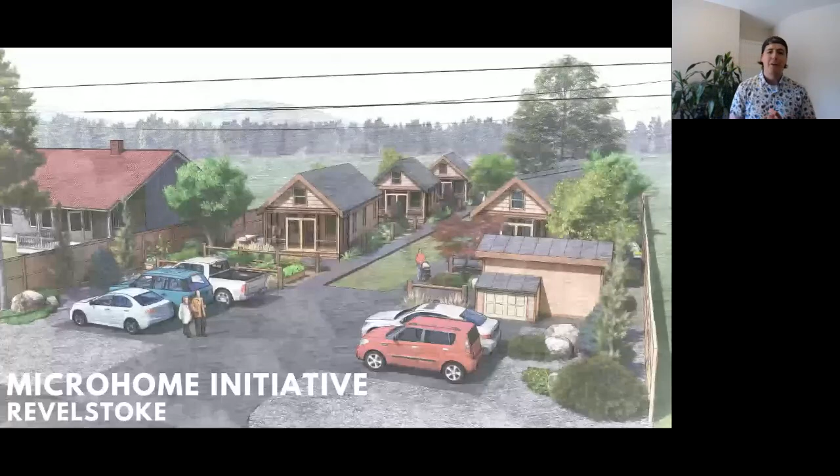And so yes, this is the Microhome initiative. I think the big value that I add to this endeavor is the ability to render and create visualizations that can help bring people on board to a project.

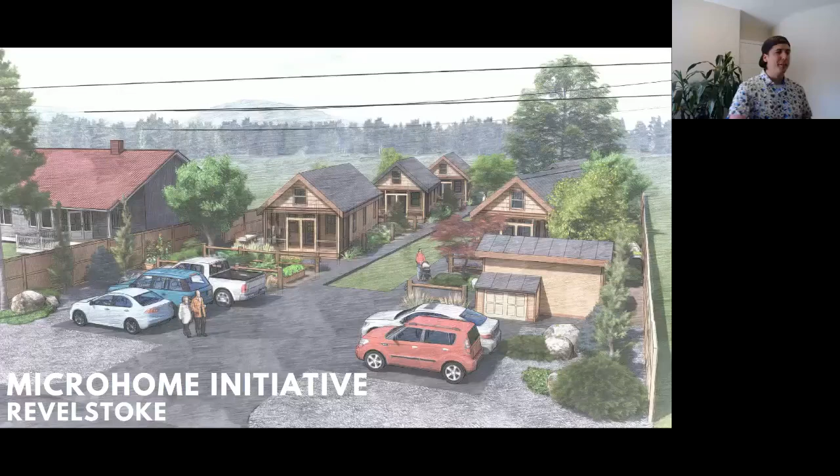Affordability, the housing crisis, these are huge topics that are really difficult for people to wrap their heads around. Ultimately, we need a plan in order to see how that is established. That today is an evolving challenge, but I'll show you the renderings and the purpose of this project.

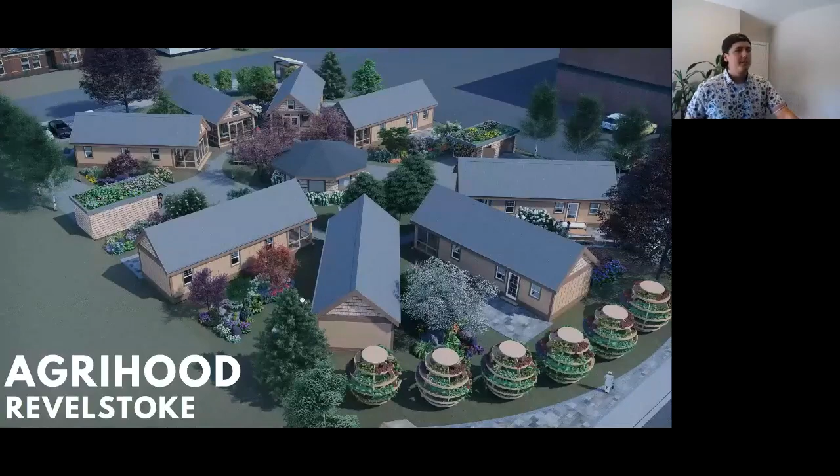So this is the project that I started on. I really wanted to look at can we create a pocket community of small homes and create them in a model of perpetual affordable home ownership. This is something I'll get to in a second, but also develop it in a way where we have sustainability and lifestyle practices of a regenerative place to live as some of the core foundations of the environment we're choosing to live in and present to our neighbors.

So some of the initial questions I had were: how big do these houses have to be? What's appropriate for the demographics of the people here? What amenities inside of the homes and outside of the homes shared among the community would be important to our residents? What would it cost to create something like this? And how can we ensure that this is perpetually affordable?

So we started doing a little study about the available land in the community. As a pilot project, I really wanted to demonstrate how we can utilize urban land within a community, in denser populated areas. I know in some of the concepts I'll show you later, we have acreages to work with, and you can do some really beautiful and creative things with a lot of space.

But looking at smaller land masses, what can we do to create home ownership where in traditional zoning and parcel subdividing, there are minimum lot sizes, minimum house sizes, that ultimately creates this sort of urban sprawl of grid-like patterns of streets that take up a lot of space, but maybe aren't using them as effectively. So there is an argument here to, in denser populations, maybe we should be building up and really densifying.

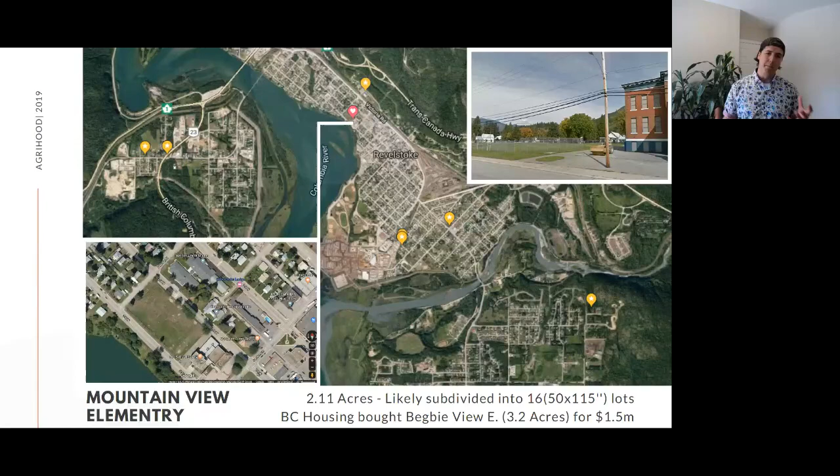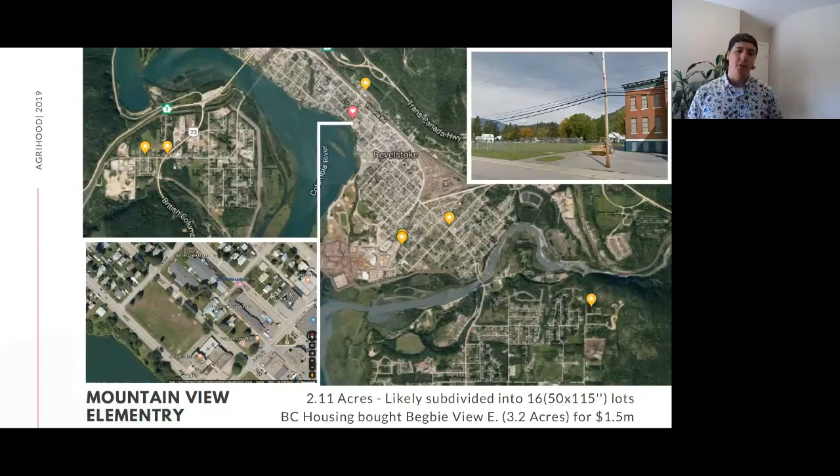But this is trying to find that happy medium, that blend between enjoying your outdoor environment, enjoying your own single detached home, because I still believe that that's what a lot of us have grown up with, are dreaming about owning and wanting in our lives. The reality for the future is that that is a privilege that many of us human beings on this planet may not ever have the privilege of having moving forward. So how can we still have those deep desires to own our own home, but do so affordably?

So looking at this old school, which has recently been turned into offices and a restaurant. If you're ever in Revelstoke, go to the old school eatery, it's absolutely amazing. Then they have this additional school property, the soccer fields here.

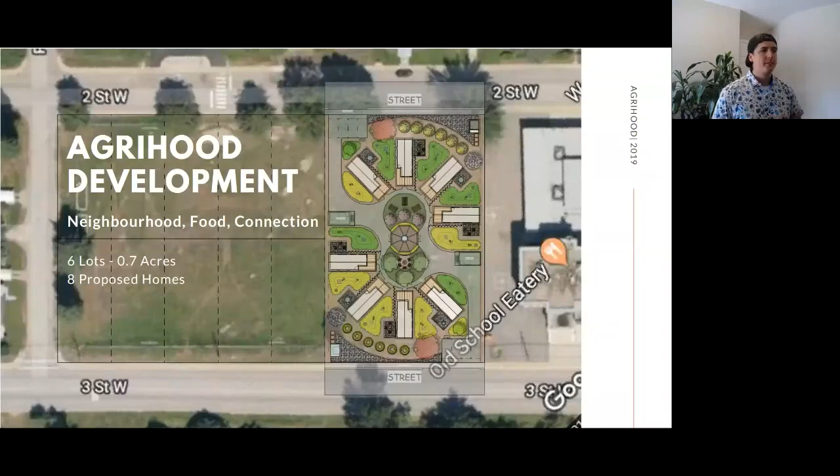And if we were to look at how the city would traditionally subdivide this land, they would create about 16 parcels here on that square block. And what I'm proposing here, instead of 16 single family homes on this lot, we're able to propose 8 homes on 6 lots. So this is the concept plan here.

And the focus of this is, how can we change a few paradigms here so that we're creating something different, but also familiar to what we as consumers want to buy, but also what we're sort of looking for in a community.

So the big thing that I wanted to address, first of all, is just how we approach the home. If you look at the suburbs or really any house in North America, you'll notice one familiar attribute is that we have streets that turn into driveways, driveways to front doors. And ultimately what that does is it creates this relationship between you and your vehicle and not your community.

And in order to connect with your community, you have to go to a park or walk down the sidewalk and confront someone head on. And ultimately, that doesn't lead to a natural conversation or an opportunity to really connect with the people that you live with in your neighborhood, your space.

So I really wanted to address this by changing the paradigm a little bit, by putting parking relatively far from the homes, but within a very short walking distance to the front doors, which I hope encourages individuals to walk in front of others' homes and connect with them inside of these social spaces.

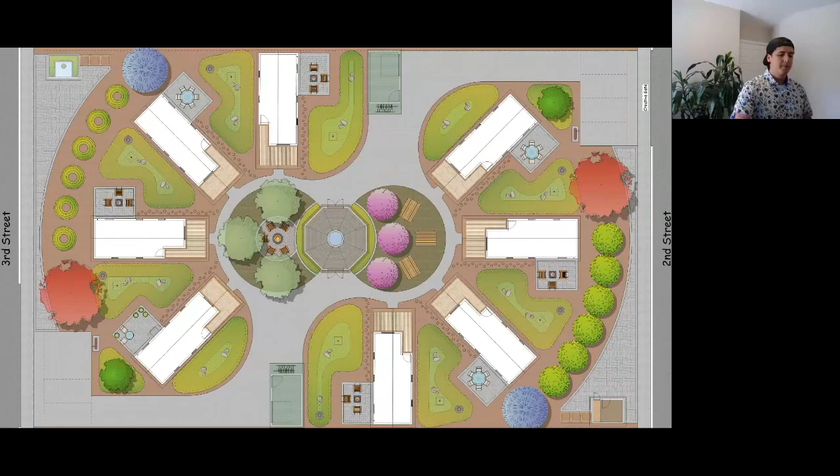So this is our concept here: if land and houses are becoming too expensive for one person to own, can we as a community come together and decide to purchase land and develop it ourselves in shared commons to spread the cost of development and infrastructure among all of its residents?

The strategy here would be to develop this parcel as a bare land strata. That allows us to have individual ownership of each of these homes, but have the remainder of the property in shared common. It also ensures that we are following traditional opportunities for individuals to grow into the middle class and create some stability in their housing options. So for example, you'd be able to get a mortgage, you'd be able to get insurance, and you'd have a freehold title to each of these homes.

And then as a strata community, you would elect a council, and that council would represent your community to address things like, are we going to pay to have our grass cut or our gardens maintained? Are we going to pay to have the snow removal? Or are we going to come together as a community and decide to save on those costs and do them ourselves?

Which theoretically, I hope, is a path a community like this would take, so that we have shared ownership and responsibilities to each other and to our space, which creates more community and connection. But if paying for it ensures that this place remains beautiful, then I think that is a really great option too.

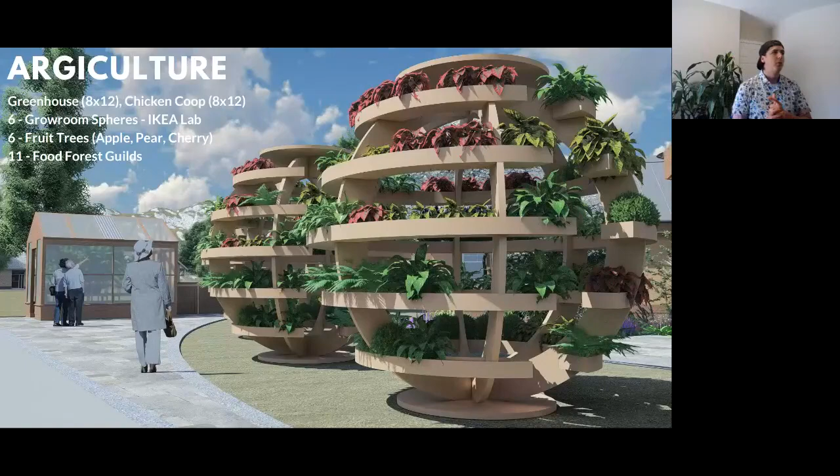Looking at agriculture as a big part of this project on this land, we'd have these 6 grow spheres. These are unique products you can actually download from IKEA, and you take them to a CNC machinist who cuts out all the parts, and you simply put them together to create this really unique grow globe. Then you can run irrigation through it, which is a really cool opportunity to not only grow food for your community, but show it off as an architectural feature, and even create a little sitting area inside there too.

Other areas like the fruit trees, the food forests in between the homes—if you've never heard of a food forest before, it's this concept of trying to replicate nature in a manicured environment of our design. That would allow us to grow upper story trees like walnuts and cherries, then lower story trees like pears and apples, and below that currants, blueberries and raspberries, and even below that strawberries, and down below mushrooms and other root vegetables, all growing in one unique bio environment, which I think is a really cool way to address food security, but also beautification and education of this space.

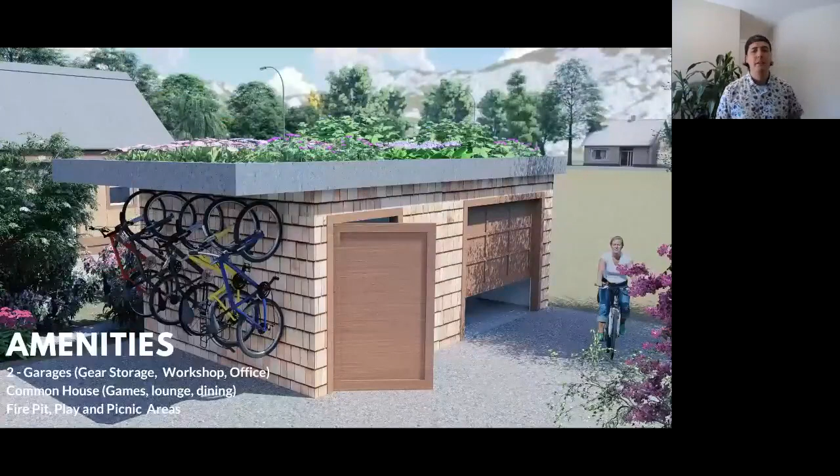I think one unique attribute that agriculture has, and what I believe should be developed in every single development, is that it creates intergenerational relationships too. It allows the seniors to connect with the youth and show them how it's done, get your hands dirty and work together, which I think is lacking in a lot of our modern communities.

When seniors get older, we put them in older age homes. When single mothers have kids, they struggle to find daycare. I think to create a strong and successful society, it's important that we're there to pick each other up.

And that's what I hope these communities can do. So some of the amenities, like I shared, a building like this could really take any shape or form.

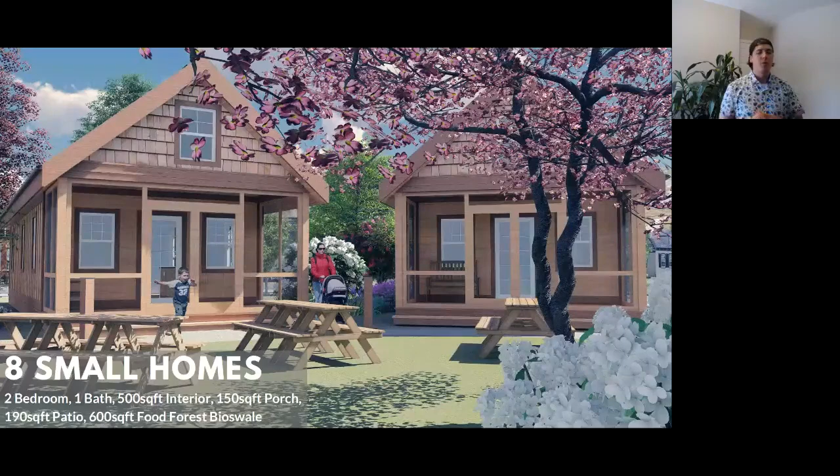A big part of this is, well, what do these houses look like and what is important in these homes? Through our research, we identified some main demographics of Revelstoke, the first being single parent families, seniors, and first-time homeowners.

A lot of the community in Revelstoke love this place, but for whatever reason, mainly affordability, they can't live here any longer. Seniors are owning big houses they can no longer maintain because there's nothing to downsize to, or young people like myself are trying to move to this community. I work remotely, and the housing affordability is really challenging.

So how do we get new blood into this community that ultimately serves volunteer organizations and all of the jobs in the community? How do you ensure that they have a stake in this town as well?

So we identified that each of these houses should, at a minimum, have a 2-bedroom option. That would allow a single parent family to have space to raise a family, or allow an individual to work from home and have an office, or just add more community members and more bedrooms to this community.

So each of these houses is about 500 square feet in size, with a 150 square foot porch, which I feel is really important for Revelstoke, because we kind of live in and out of our homes quite often—storing snowboards or skis and having that separation so you're not shoveling directly in front of your front door. There are some days I've had to literally shovel my way out of the house.

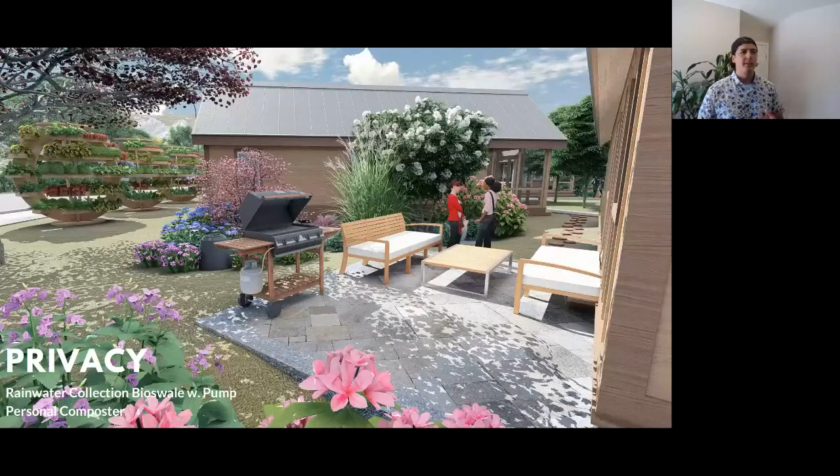So this is the blend we're trying to establish between an eco-village and ownership. Somewhere on this dynamic, we have the eco-village where everyone shares everything. They may not necessarily have home ownership, just living in a shared space, eating together, cleaning together, growing food together. That in itself can be a very beautiful and enriching lifestyle.

But for many of us modern Americans, it can be quite scary to connect with neighbors on that level constantly. I've lived in eco-villages for a few weeks at a time, and I'm quite open-minded, but I struggle sometimes with needing my own space, needing to cook my own meals, because those are the things that make me happy. So what I'm trying to establish now is a blend where we can have all these things by choice, but also the necessity of affordable home ownership in Canada and the United States.

On the other end of the spectrum, you have home ownership, with fences and driveways that disconnect us from our communities. In our society today, it's becoming so important for us to connect and create relationship, because there are so many things trying to divide us and create differences among us, that I believe these spaces can really help partner us and blend us back together as one larger global community.

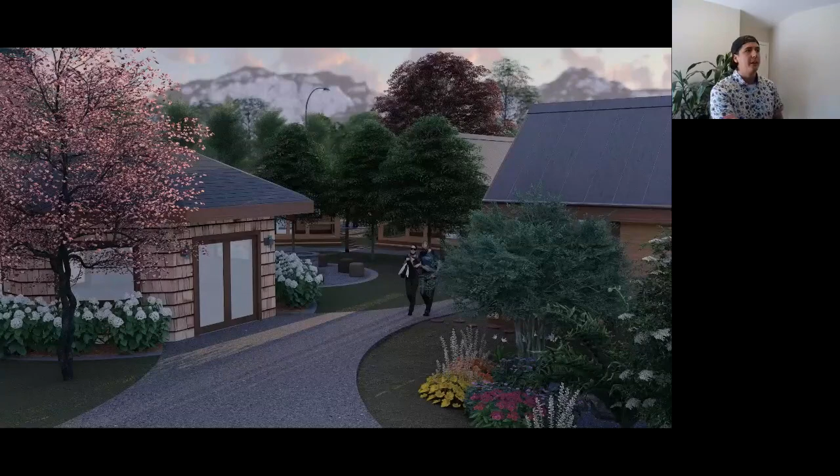This is just a final view of a night shot with the Begbie Mountains in the back. Really, what I hope for is a very beautiful place to live.

So if, for example, about an acre, three-quarters of an acre, would cost $600,000. Currently, I'm looking at a project where we can purchase 3 acres for $800,000, which allows us to do a lot more creative stuff. I'll show you in a moment.

If we were to look at creating these small homes, I recognize that $200 a square foot for housing is probably not realistic anymore, probably closer to $400 a square foot. But let's use this as a case study of what we think should be appropriate for home ownership. So about $1 million for the houses, about $250,000 for amenities, buildings, landscaping, utilities, and legal, calculated roughly at 20% of total construction costs. If we were to develop 8 homes on that small piece of property for $2 million, we could, in theory, create each house at $250,000.

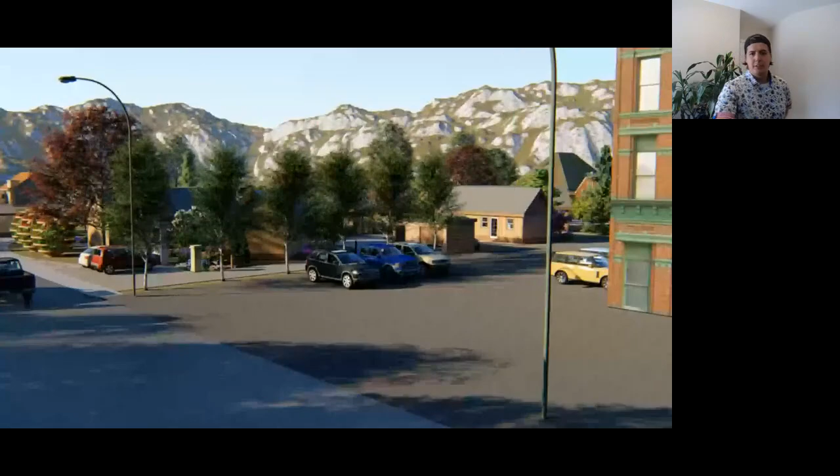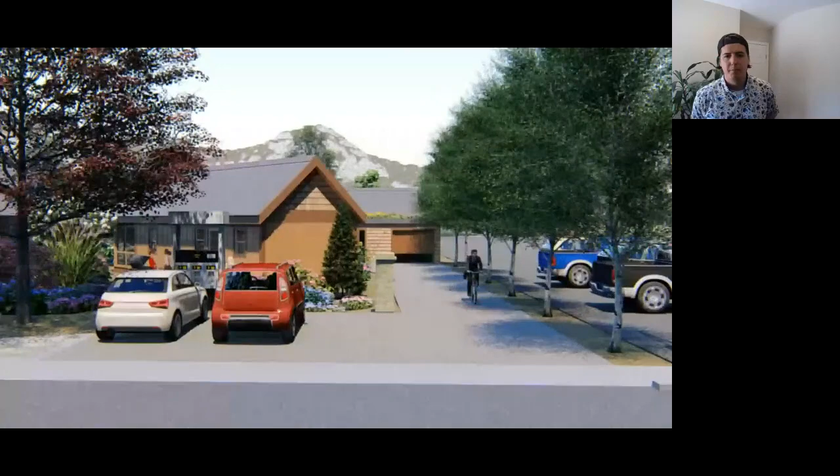Sorry about the choppiness. Yeah, so the perpetual affordable home ownership model allows us to take that out of the speculative market and create opportunities that ensure it's available for future generations.

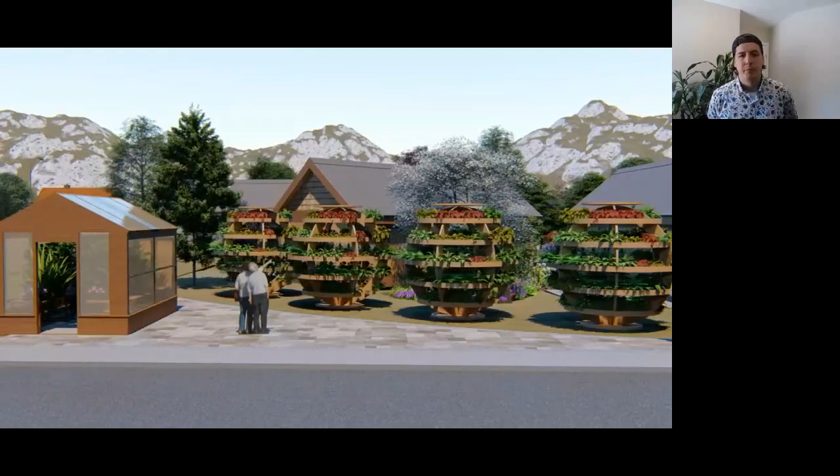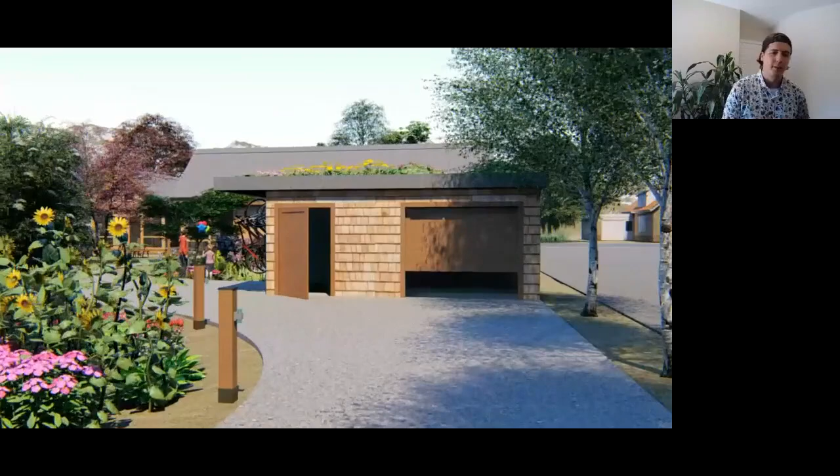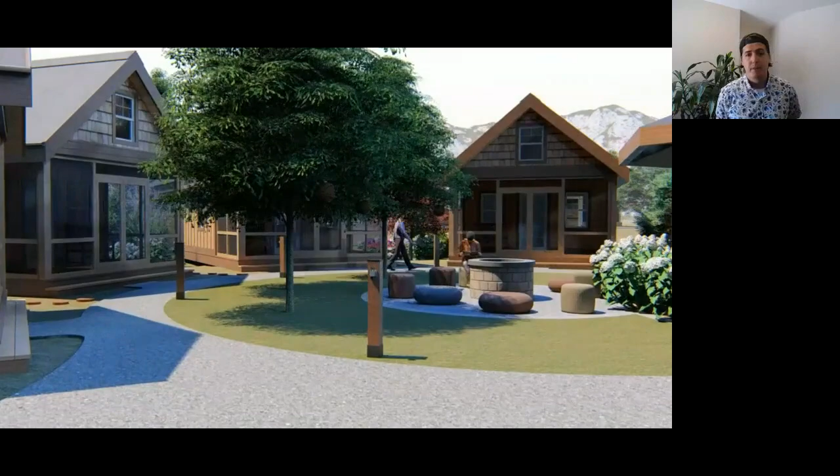So if you were able to purchase a house for $250,000 today, you can now afford a house 10 years later for maybe $300,000. Because what we're accounting for is a percentage of increase that is not 20%, but more along the lines of interest, inflation, and maintenance on the house. This last year, because of COVID-19, we've seen an inflation of 6%, but in traditional years it's much lower. So if we account for maybe a percentage increase of 3 to 5% every year...

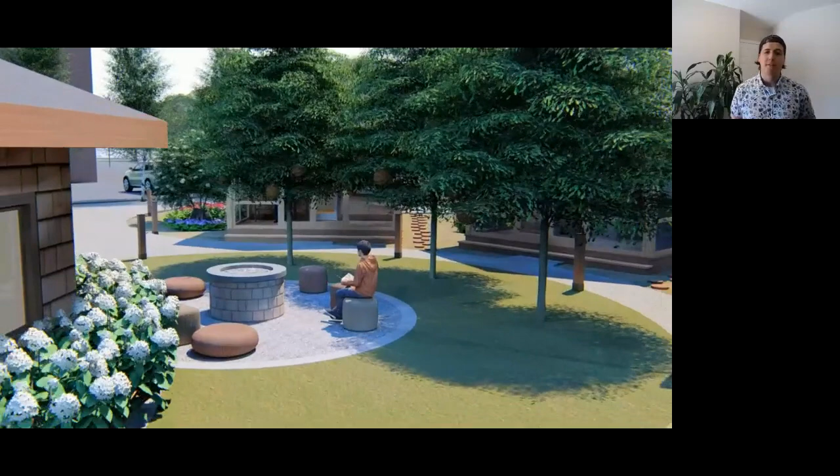You can expect that house to still have a relative investment on the value of your home and your investment, but you're not getting these runaway prices where you're going to walk away with an extra $200,000-$300,000 in your pocket after living in your home for 3 years.

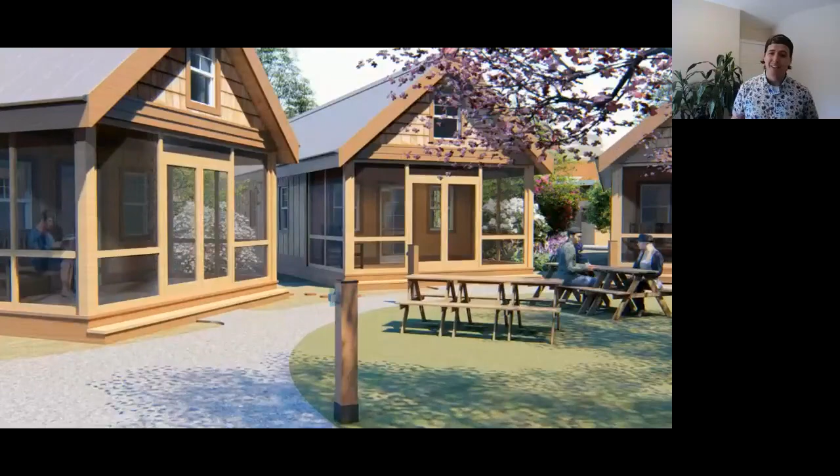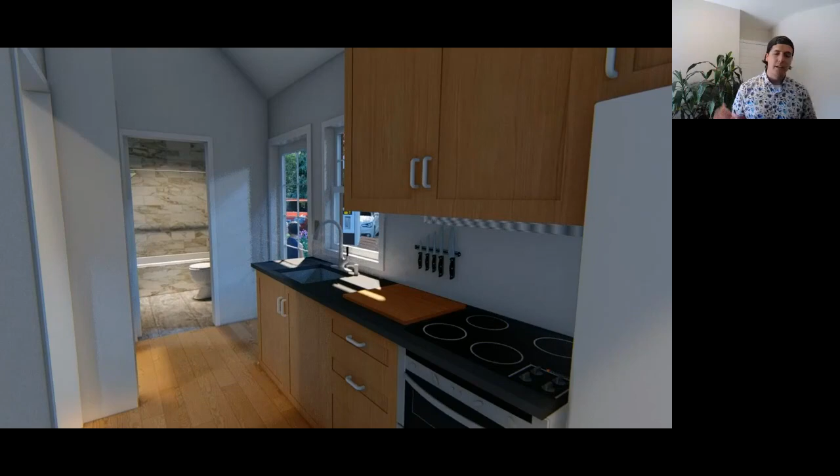What this does allow you, though, is to buy in low, save your money instead of putting it towards rent, and build some equity, develop relationships with banks, have that relationship that you can then transition as a stepping stone into bigger and later developments, which I still feel have an important intrinsic value to developing the middle class. But currently there are no stepping stone opportunities in Canada, period. And that needs to change.

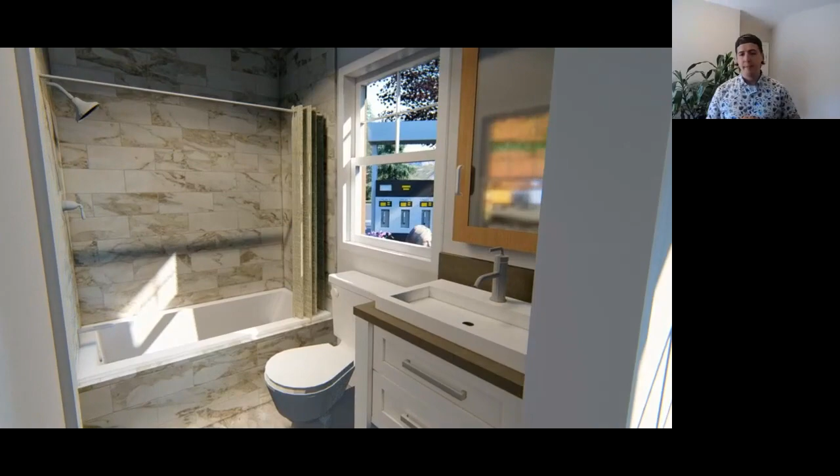Something needs to happen. And so uniquely, some of the things that are happening right now are the Canadian government just released their 2022 budget, and affordable housing is a big ticket item in that budget. Some of the things they're investing in right now is co-housing. They haven't invested in co-housing the last 30 years, and they seem quite excited to reinvest in that.

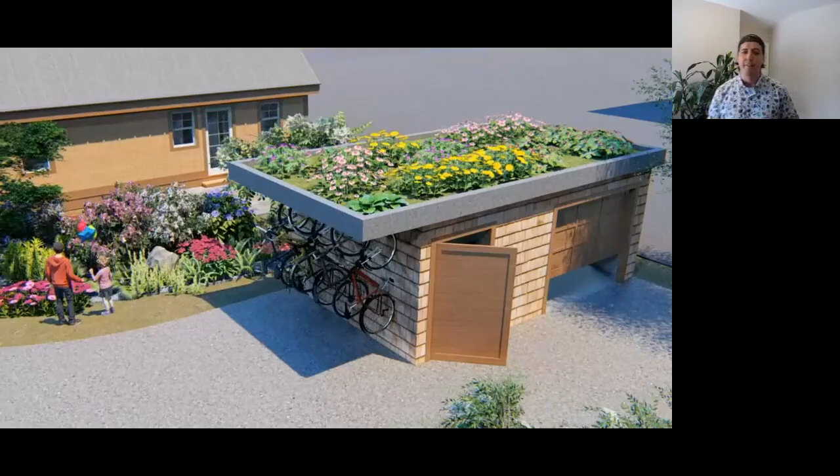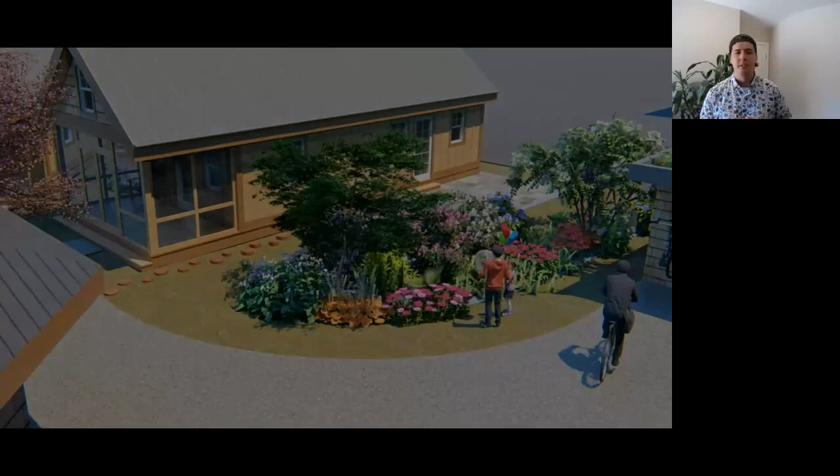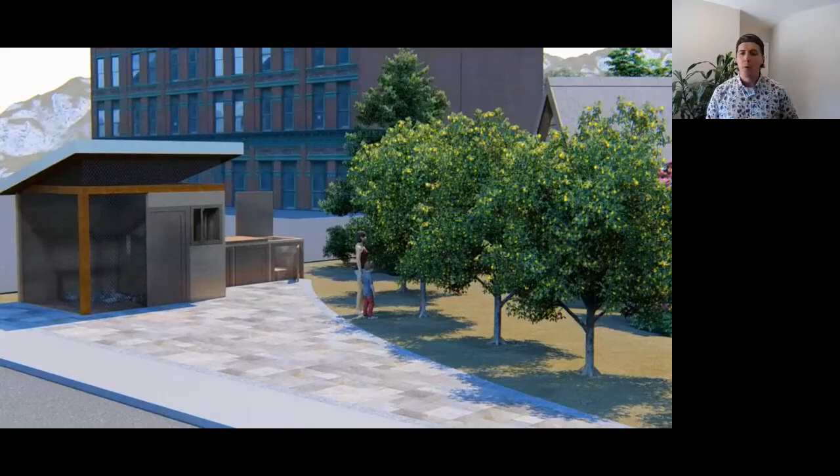However, my experience working with the government so far has been quite challenging. Like many of you are saying here, Chris says Canada is very rigid and very behind, and that is very much the case. For the past 3 years, as I've been sharing these concepts, developing relationships with builders, developers and landowners, I've been trying to develop relationships with politicians and stakeholders in our community to make this a reality. And most recently, about a year ago, I joined the Revelstoke Community Housing Society, and they have adopted this project as their own, which would ensure the nonprofit status to bring this project to reality.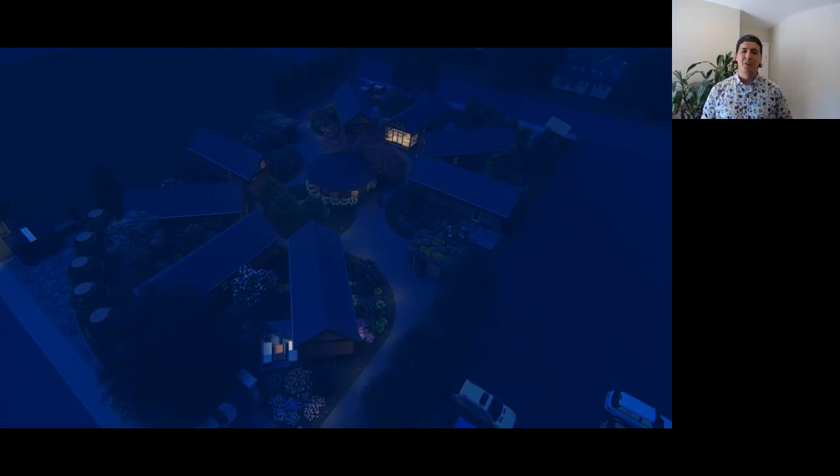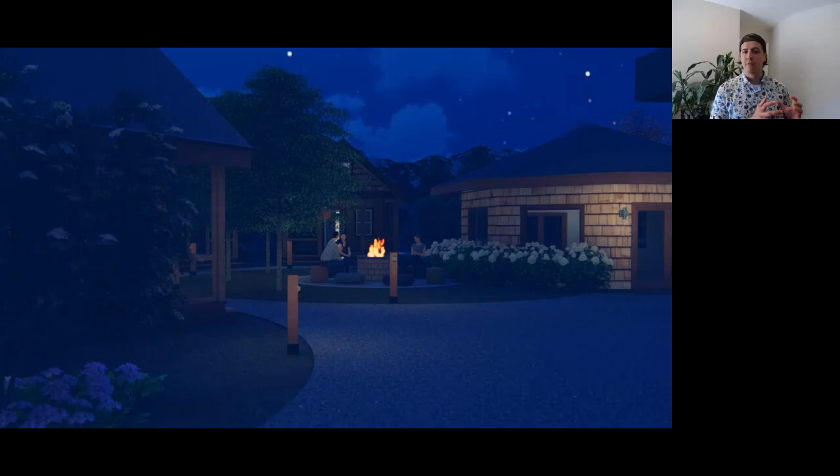What I'm experiencing is that I had this expectation that once we're a nonprofit, we'd have the ability to apply for grants that I felt were so abundant and that Revelstoke wasn't applying for. Unfortunately, what is quite available is funding and financing and support for rentals and the creation and development of rentals, but not for home ownership.

And I think that there's a huge disparity there, because although rentals are very important, don't get me wrong, it's very important that people can quickly find and have a home to live in, but it doesn't at all lift that person out of poverty, low income, or even close to entering the middle class.

As many of you are probably aware, over the last 60 years, incomes have literally quite stayed the same in relation to inflation and the cost of living. We've seen modest increases in our hourly wage, but when it comes to the price and cost of rentals and housing, it's gone a complete curve.

So that is a systemic issue that many North Americans will continue to face right now, which I believe many of you have decided that living in a tiny home will address, and I believe you as well.

And I think that those things will change pretty soon here to allow for more of those opportunities. So here is a development proposal that we're currently working on right now. This is a 3-acre parcel in the Big Eddy area of Revelstoke. It's more of a rural space. This used to be a larger 7-acre property that kind of takes this sort of number 7 shape. And currently we are working to subdivide the lot to allow us to create this 3-acre parcel.

Inside this space, I really wanted to create an opportunity for phased developments. As taking on a project like this will cost many millions of dollars, I think we need to start more realistically and start, one project at a time.

One that I'm very interested to follow up with and to introduce you to afterwards is Spencer, Patrick, and Allie from EcoVillages.life. They designed this beautiful, 1 or 2-story, two-bedroom unit that I really like and thought it would be cool to implement in these designs as well as a concept. But you'll see many of the same similar attributes to my last project to be implemented in this one.

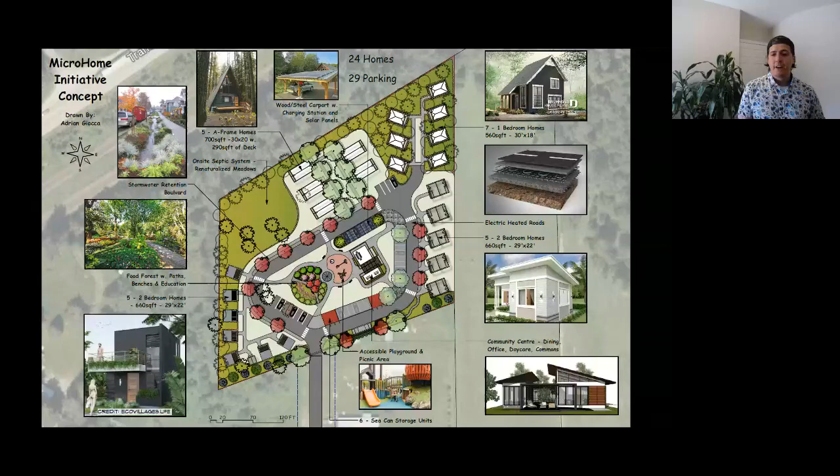I think that's something that a lot of people in Revelstoke are looking for. And this sort of government $10 a day daycare is a really great idea and should widely be accepted, but it's widely not available. And people are spending thousands of dollars a month on daycare just to maintain their family lifestyle, which I believe could be taken care of by a few select parents or even seniors of this neighborhood to support each other.

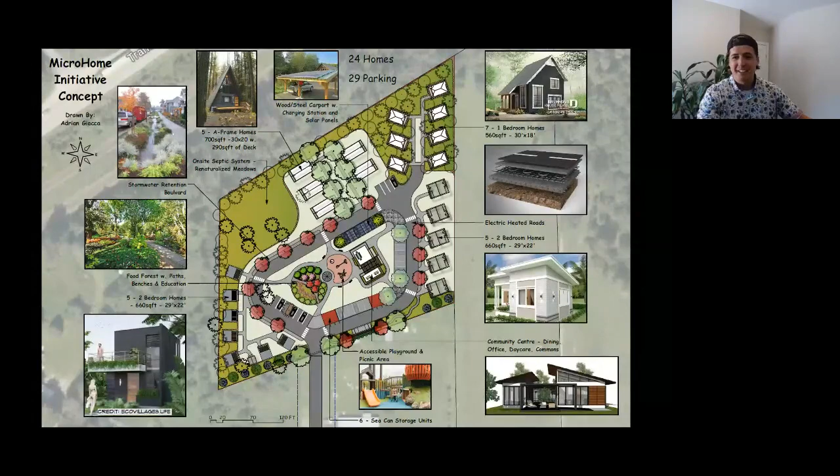And so maybe I'll take this opportunity right now to sort of take in some questions. I'll show you some more renderings. And if you'd like to take the mic and talk to me, I'd be pleased to answer any questions. We have about 20 minutes here before we introduce Eco Villages. So let me just pull up another design here.

I'll look through some of these questions here to see if you guys have any.

Will grants available with being a non-for-profit cause a reduction in prices to make it affordable for low income? Yeah, that's definitely the purpose of this project - how can we use this available funding to create opportunities for residents in these developments. Just recently I applied for a $70,000 grant provided by our municipality, which they got from the federal and provincial government for a safe COVID restart. The federal government recognized that municipalities across Canada have seen delays because of restrictions, and they're paying local governments money to help bring us back up to speed so we can move on with our lives here.

$200,000 was made available, and we applied for $70,000 of it, which, to my understanding, was the unrequested leftover amount. So we went for it and asked for all of it. That will help bring our Affordable Housing Society back into a position where they can afford to provide affordable rent for their new building they're creating.

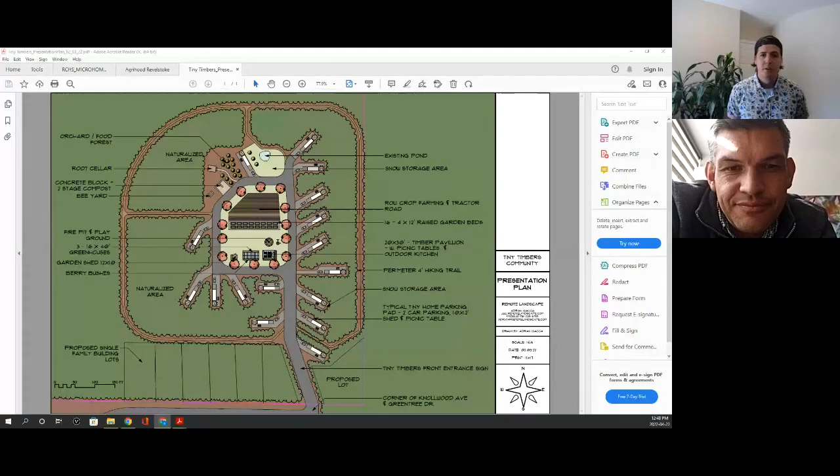Yeah, it's a great question, and I think it's something that is really quite specific to the area you're developing in, and the goals of the project. For example, we're trying to be as affordable as possible, and that naturally takes out quite a lot of innovative ideas that would create more self-sufficiency on the property - things like geothermal, which could potentially heat all of the buildings by digging a big hole in the ground and pulling up the Earth's heat. That would be a great option, but could be quite expensive.

Being that we live in a community that has a dam, electricity is our most sustainable option. So it's probably a smart choice to connect and pay for that. And being that those are the services that are provided, it becomes the most affordable option.

Other ideas like solar roofs and things like that I think are really awesome and are only ever going to get better. The challenge we experience here in Revelstoke is we've got quite a bit of snow and quite a bit of annual rainfall. I'm sure a solar salesman would tell me that won't make much of a difference, but from what my understanding is, it does, and it may not be the most reliable option as well.

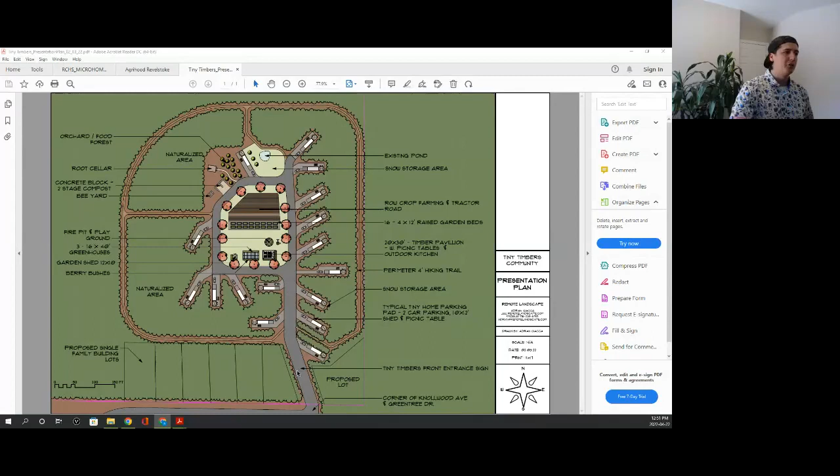This particular project here, again, is a tiny home community. I think you can do a lot more unique things with a larger space. You can see here that utilizing every square footage of the land wasn't a huge priority for them, but they mainly wanted to create an opportunity for people to bring and park their tiny homes on site.

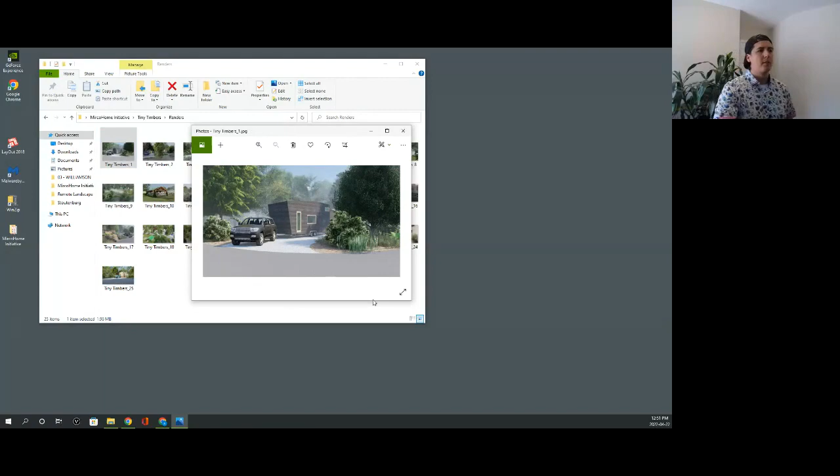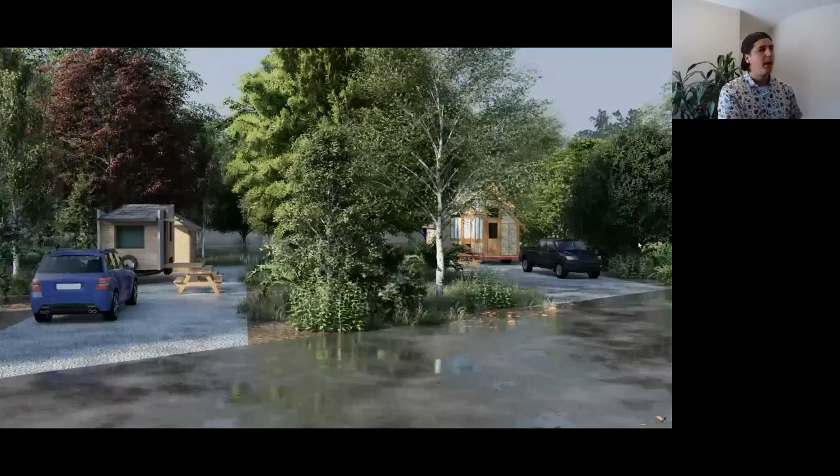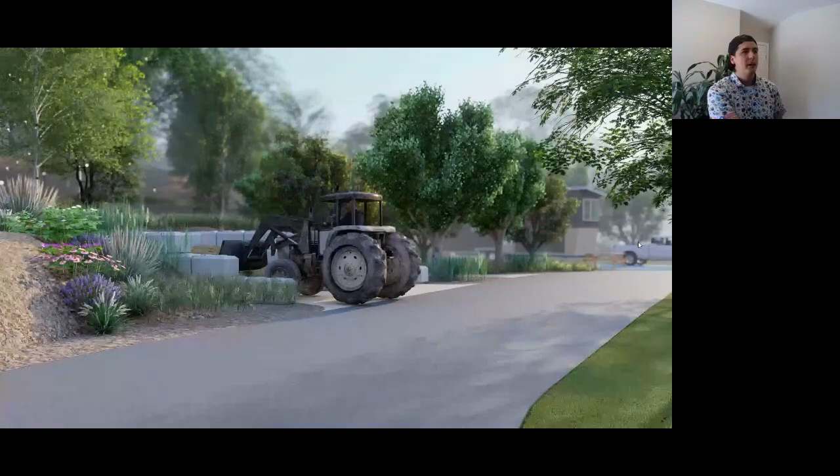This is part of what I do as a designer - help a landowner evaluate their land and develop a proposal that allows them to visualize their space. Most importantly, take this to the homeowners, but also the governing officials that will allow them to use this land for this purpose. 3D models and 2D plans are an essential tool for communicating those ideas.

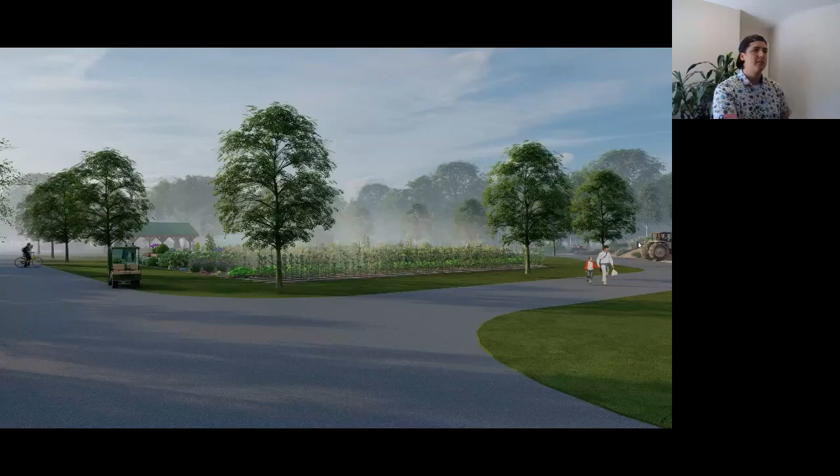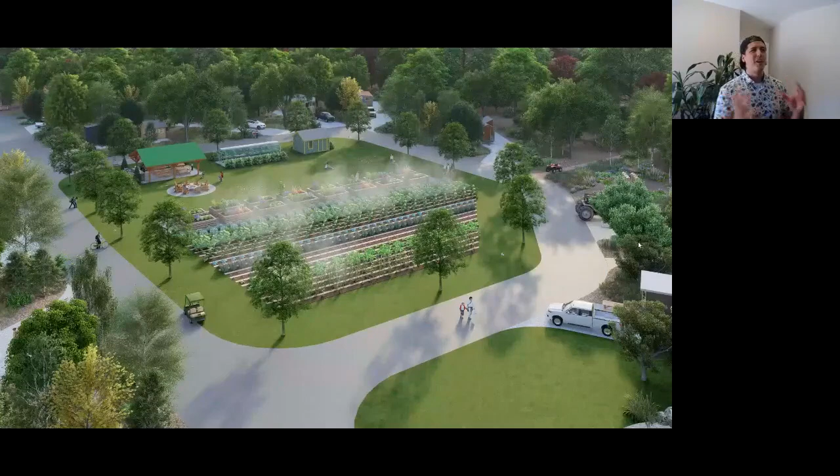A lot of the same sort of ideas as well. I think naturally many of us in this space think about living in a tiny home kind of in the same way. This was very much their site plan layout and how they wanted to lay it out, but you can see it's very similar to what I was proposing, and something also very similar to what you'll see out of Spencer and Patrick in their presentation from Eco Villages.

So you'll see here we've got large farm gardening spaces, opportunities for compost with tractors and whatnot, bee farming, large communal picnic space, greenhouses, shared common amenity sheds, and tiny house parking and locations for your home. Each of those lots would have their own shed, picnic table, and a gravel path to enter the space.

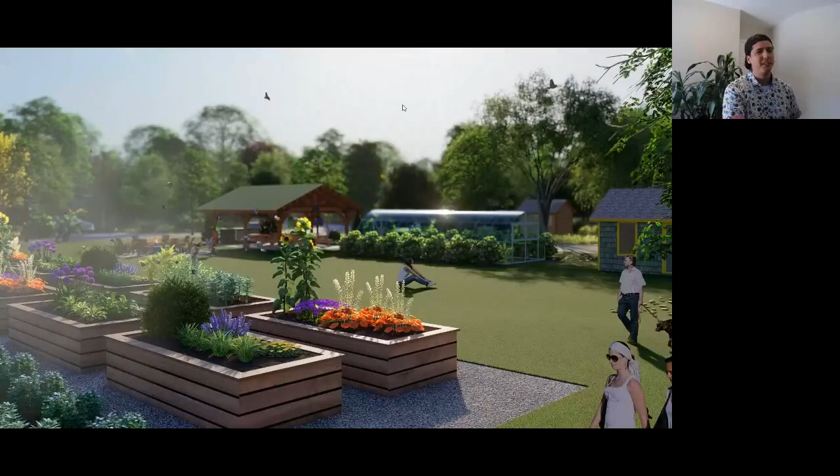Yeah, this was a very cool project to work on, something that I hope gets them closer to building. Just a kind of a sneak peek into some of the work that I do. So if any of you have projects you'd like me to have a look at, I'd be pleased to put together a proposal for you to see what it takes to bring that project to life.

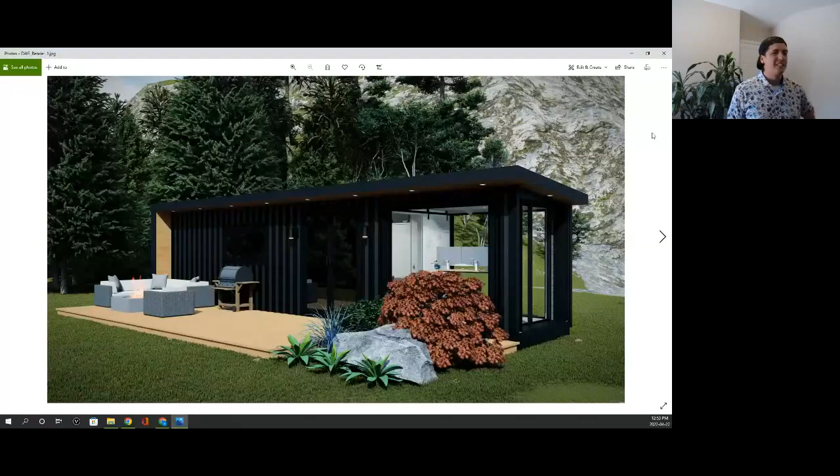This here is a company I work for out of Golden. Christine, I believe you can find these guys - they're Tiny Timbers, and they do some really awesome cedar renovations.

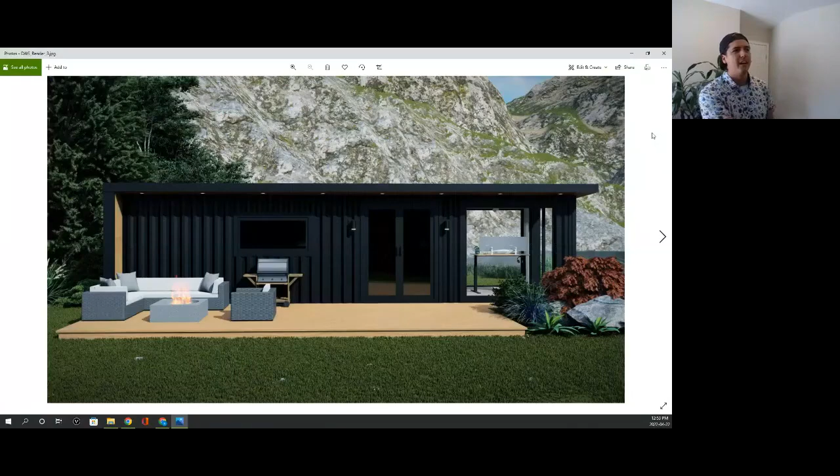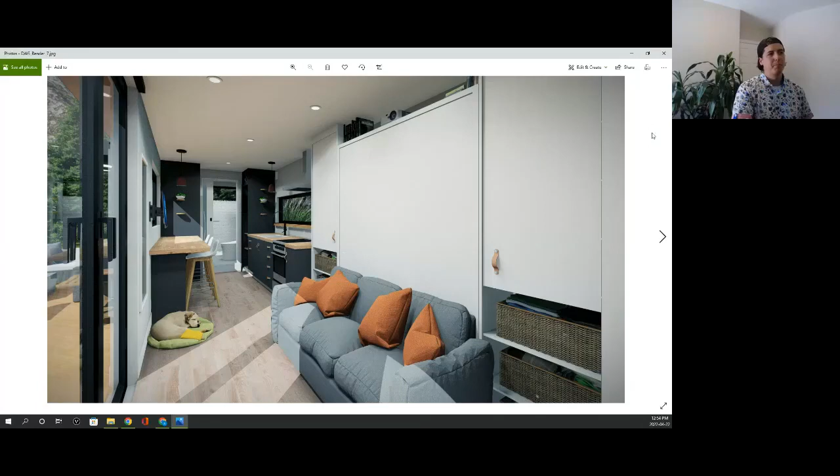This is a design I did for them that allows them to have a bedroom and an office space as well. So this could be, you know, a sweet little Airbnb unit, but also could be a pretty sweet residence as well. This is something I helped them design in this really quite magical environment, which I hope doesn't take away from the beauty of this rendering and the home they're creating here.

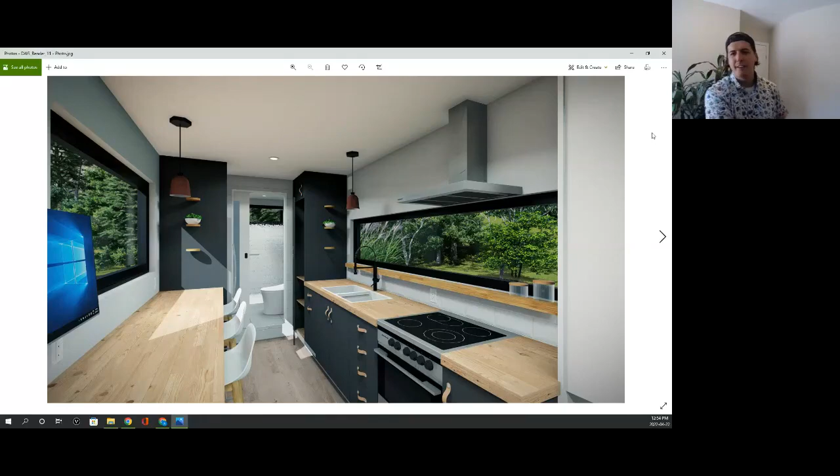Torch and Timber is the name of the company, out of Golden.

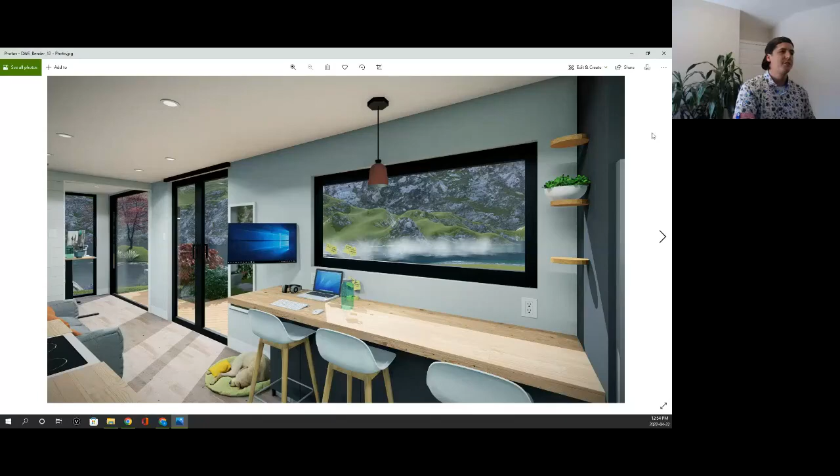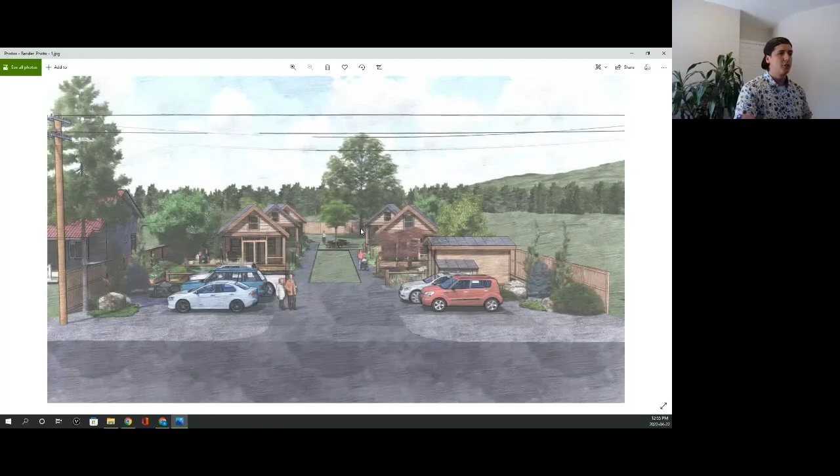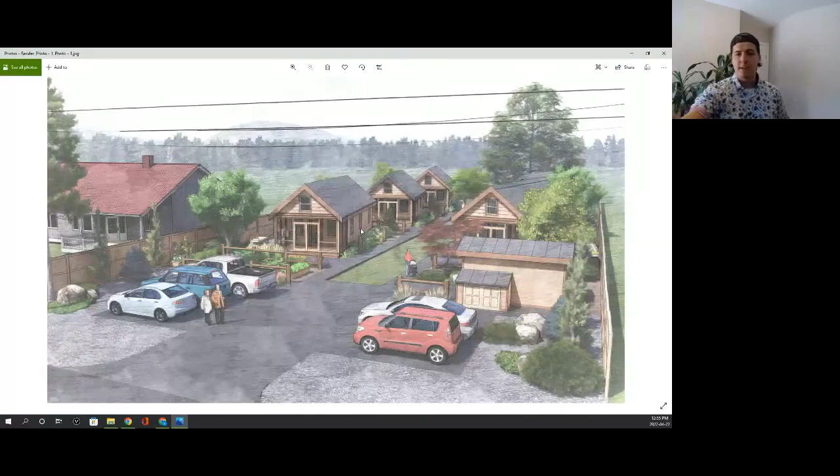In the meantime, I'll show you very quickly another project here, with an even smaller piece of land. Again, what can we do with our urban single family lots to create houses available for many rather than a few? Similar attributes: shared common parking, shared storage and gardening space, and a courtyard design that allows an emergency vehicle right to the front of every door while also providing open green space, maybe for some bocce ball or volleyball.

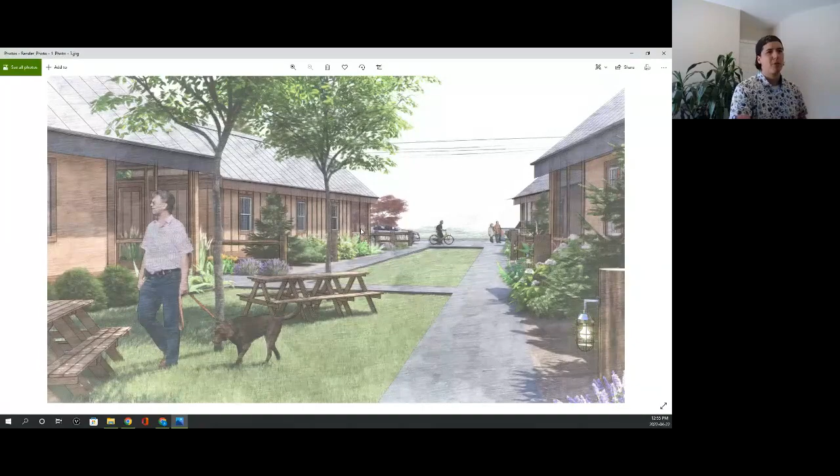It creates an aesthetic that fits into a mountain town, which I think is pretty cool. For this rendering I chose a more artistic pencil crayon look, more of a conceptual sketch. You can see we leave quite a bit of open green space in the back, which might be great for hosting a farmer's market or a wedding, or whatever you want to use that space for. I think it's important that the community has the ability to dynamically use that space.

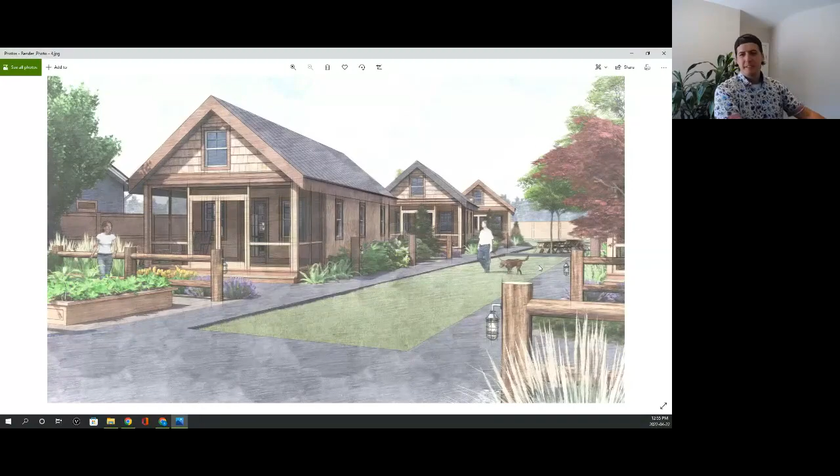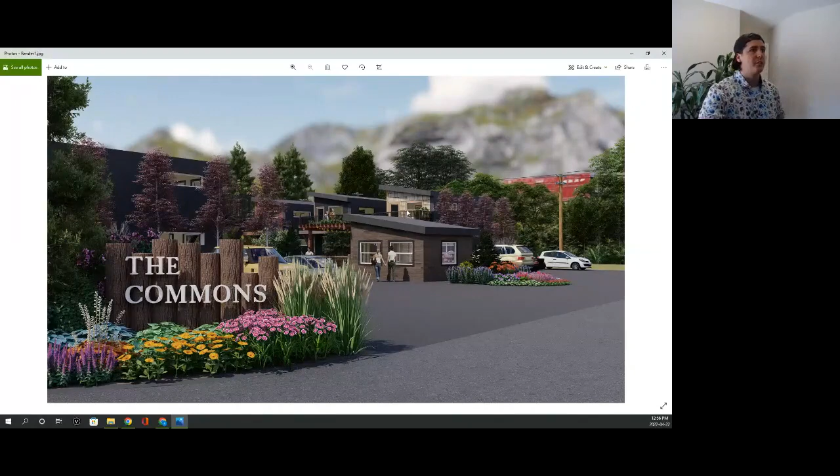Thank you, Christine. So that's one other project I'm working on. This is another concept I created, looking at the same square footage as all these other houses I shared, but looking at what it would look like if we created 2-story units.

There's certainly a fair argument for why not connect all these houses, create more of a townhouse style development, and increase the available square footage for all residents and maybe additional units. I'd say yes, I think that's also a really great idea, and there are a lot of great townhouse developments that address all these other amenities we're also proposing here.

But for this concept, I really wanted to see if we can create houses that can be manufactured off-site, since we have a lot of rain and snow which reduces our available time and money for construction. So can we create these units off-site, maybe in two phases, the bottom story and the top story, and then install them on the property, which will allow us to create more affordable units.

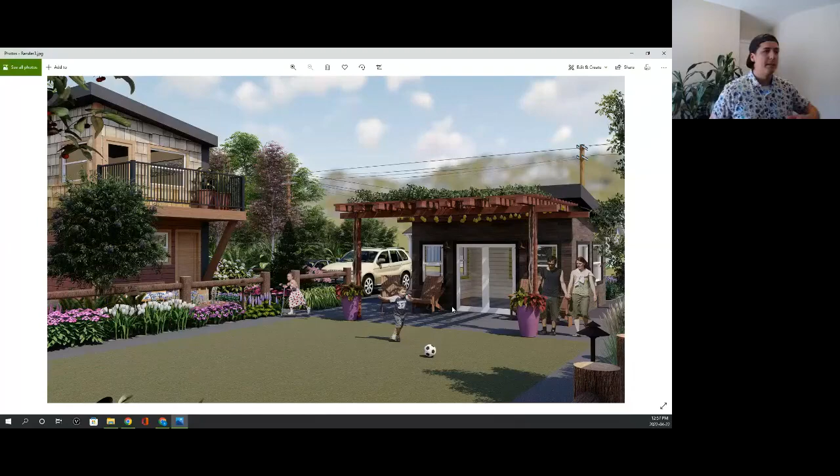This particular one is a 2-bedroom house, about 700 square feet, certainly quite a bit of space for a small family to live in. Again, shared spaces like the shed, pergola, and open yard. What I'm really trying to show here is the potential of green space available when you give that to a community to use and design with. Each one takes on its own unique flair, but I think it gives homeowners the creativity to take stake and ownership in their space and be proud of the area they have to grow in.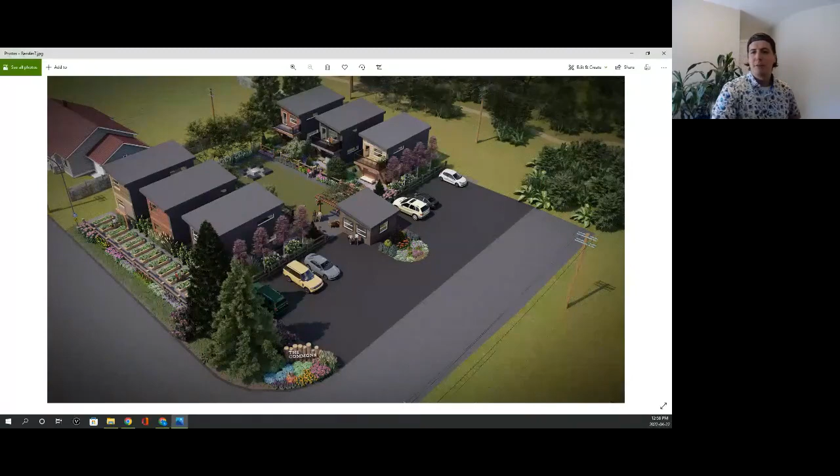And that's our final units. I've got just a couple more minutes—any last questions or things you want to ask? Otherwise, I am completely honored to be here.

Thank you, Jason and Zach. It's been an absolute pleasure, and I hope I haven't been too repetitive in the last couple of years. I hope the next time I speak with you all, I'll have some really exciting news, as we maybe receive a grant and the opportunity to develop the project.

Without further ado, I'm pretty stoked to introduce Spencer and Patrick, who are the co-owners of Eco Villages. They've designed some really beautiful communities, which I feel are in some respects unique to mine, and amazingly, because of their Central American location, are actually really quite affordable. So if you're looking to buy one of these units, they're going to be available for you right now, and I'm sure they'll be able to show you which ones are available.